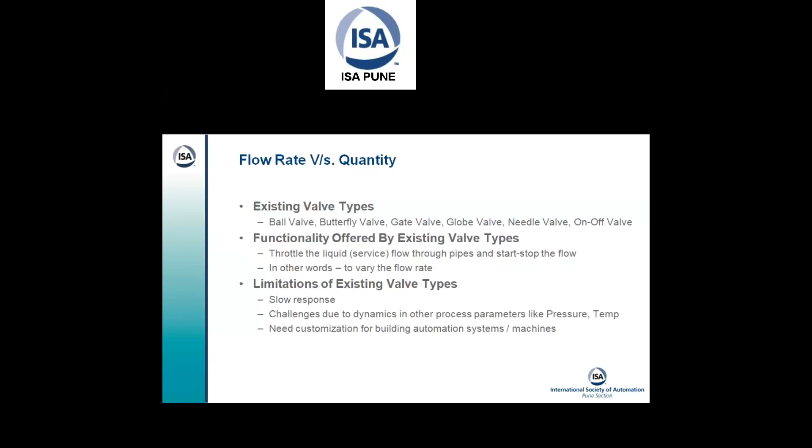So when liquid dispensing depends on flow rates, we need at least 2 to 3 different flow rates, then limited bandwidth due to customization. Then we have compensation arrangements for dynamics, making the automation complex, which leads to higher capex, opex, and space. Ultimately, due to less accuracy, huge cumulative losses are there.

And as these are the known limitations, and still some of them are in use, there is another alternative to valves, particularly the positive displacement pumps, the PDPs. And these PDPs, if they need to be controlled well within fine control, you need VFDs as well, which have a limited bandwidth, and again, huge cumulative losses are there.

And thirdly, flow meters or flow totalizers are used to take the feedback of what quantity has passed through, and the control or cutoff is made accordingly.

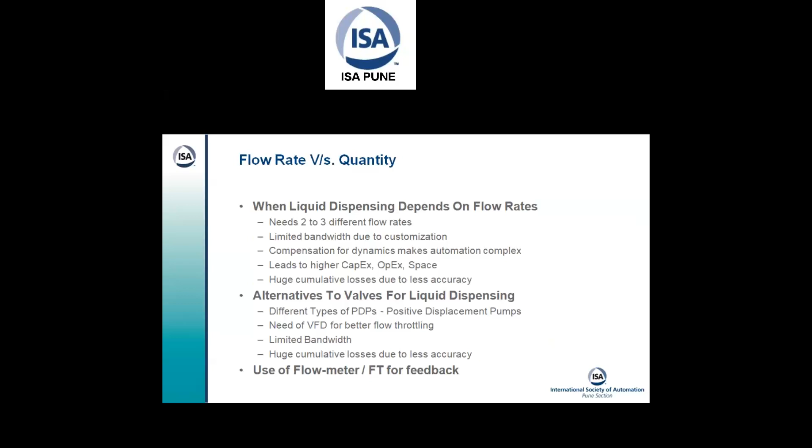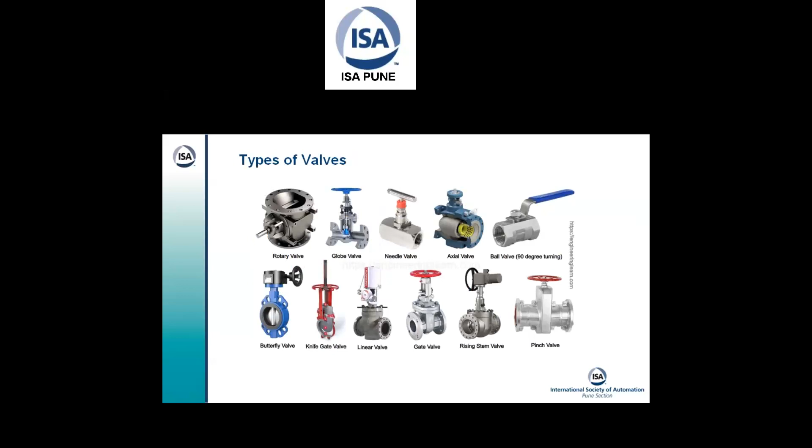So here are a few valve types. Not all of them are used for liquid flow. As I had this image, I chose it. Certainly the rotary valve we do not use for liquids, but then other valves, irrespective of their actuation, whether manual or automatic, these are the basic types in pictorial form. We have put it over here.

And next is the positive displacement pump. Not all the types, but some major pumps for positive displacement are displayed here. So they have their own advantages and disadvantages as well, but the things are not so simple.

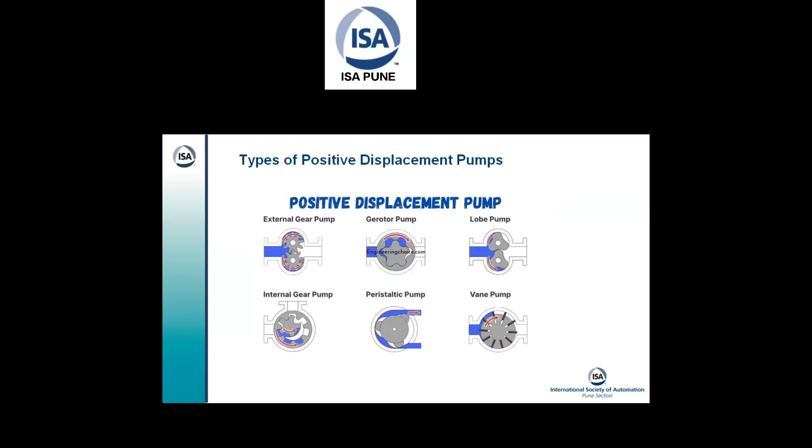So here comes the patented digital controlled valve, a disruption, or you can say a disruptive invention in industrial valves. So what makes it so disruptive? Basically, these valves are industry agnostic. That means you can use it right from any to every industry vertical.

Number two, the biggest advantage is these valves are configurable. Configurable means when you put a valve, you can simply configure it at a given site for the given requirement. You will see the details in upcoming slides.

These valves are versatile as far as liquid dispensing is concerned. They are precise and accurate — to what extent, that also we are going to see in upcoming slides. Then they have wide rangeability for multiple parameters.

So what are these parameters? Especially the header level — when the valves are connected to overhead tanks, the header level plays a very critical role. So a very wide range of header level can be supported.

The wide range of viscosities and liquid parameters, as well as dispensing and ambient temperature, can also be taken care of, since dispensing is based on a calibration profile. The product comes as a pair. Here I am marking the digital controller and pointing it out on the wall itself.

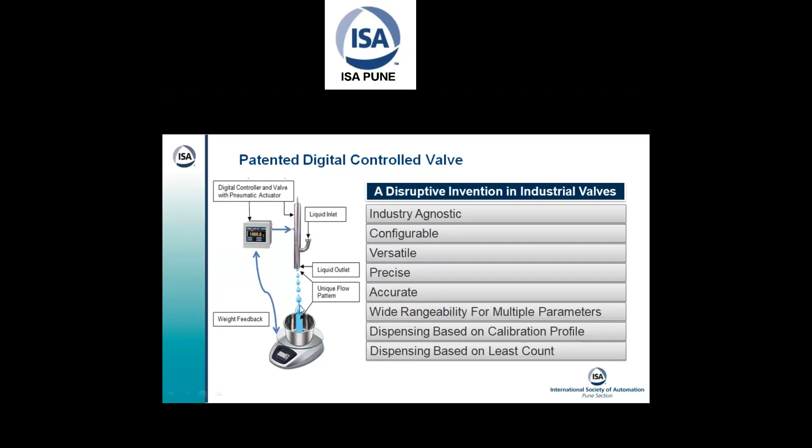Then the liquid outlet is here. The liquid flow pattern is shown here. The weight feedback goes to the digital controller, and then it modulates the air pressure to really dispense the liquids over here. Now, what is the next thing?

It is actually a sustainable paradigm shift. It is not for the sake of invention alone—the things are going to stay and make a sustainable impact on the industries. Secondly, as it is industry agnostic, and the changes are across the globe, it is going to have a global industry impact.

Then you have a simple application to take forward: select the valve off the shelf, install and configure. So out of very few valve sizing variations, you are able to pick one valve, install and configure, and you are sorted. It's readily adaptable to most liquids, and it sets new international standards in accuracy and precision, high return on investment and cumulative savings, and multifold savings make it a green technology as well.

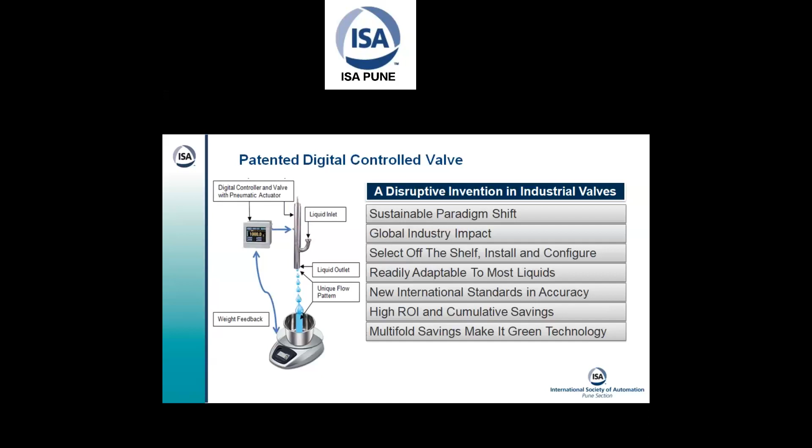So what is the USP? We must know, being a TechTalk here, the unique working principle of it. The newly invented liquid dispensing valve, in combination with the digital controller, generates dynamic aperture according to modulated pneumatic pressure.

As the pressure is modulated, the aperture of the valve opening is also dynamically changed, and the changes are so quick and for such short times that it dispenses a very unique flow pattern. So there is no typical flow throttling as we see in analog flow throttling—this is all digital slicing we do, and that is why we call it a digitally controlled valve.

So in the unique functionality, you will see the same thing—this generates a unique dispensing profile of discrete packets that are finely or closely deviated. The smallest packet quantity can be a drop weighing a fraction of a gram.

While when it is 100% open, it delivers the maximum flow rate, up to several hundred grams per second, and it depends on the valve size as well. This may vary with changes in size and other parameters involved in a particular application.

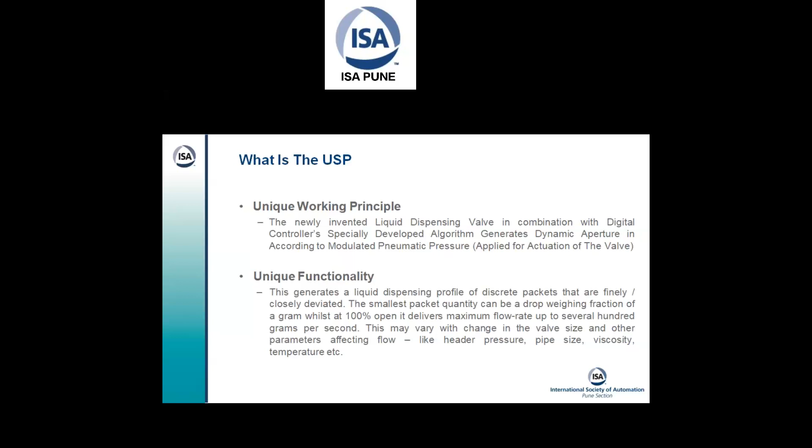When we have explained so much, we must see the product on camera—how does the product look, and what are the product connectivities?

Here is a very simple arrangement where you can see an overhead tank mounted. Simple pipe connection is here, and here is the valve, and at the back of it is the digital controller. You can see an electronic weighing scale here, where you can place a container, a bucket, or whatsoever to receive the liquid. So this is a closed control loop.

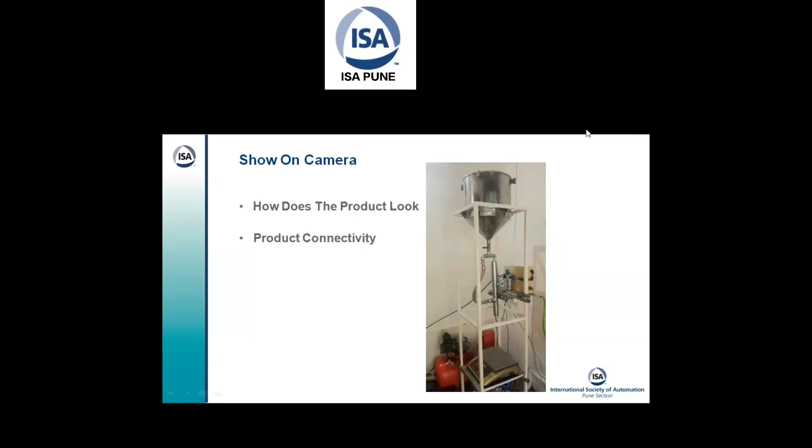So I'll stop my sharing and come on camera to show you the product, and come back to the presentation again.

So I am here on the camera. You can see I have the product right here. As you have some idea about the product, now I'm holding it horizontally so that it is covered in the camera.

So this pipe-like structure is the valve. I'll show it part by part. The upper part is the actuator. Here you can see the pneumatic input fitting for air modulation. Then this is the liquid inlet, and from the bottom is the outlet, which is tightly shut off right now. So this is the valve as a complete product.

And here is another, much smaller version of it. You can see the difference in sizing between the two products. This is under development, almost done, but we are still working on it. So such a small product is also available, and other sizes are equally available.

So I'll share the presentation again.

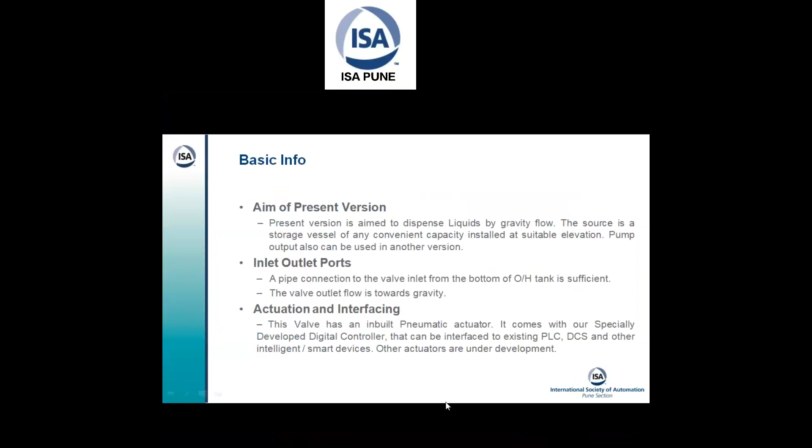So how is the feedback and control? This particular version uses the feedback from electronic weighing scale or load cells for a closed loop system. And as you know, the actual quantity doesn't vary. The weight is constant irrespective of change of viscosity also.

This particular feedback from electronic weighing scales is much more accurate than any other quantity measurement instruments. It gives you the highest accuracy when you take the feedback from the electronic weighing scale or load cells. Feedback from other process parameters is also possible, and we can calibrate like pH, temperature, viscosity in a process tank, and based on that, it can predict and dispense.

If you maintain a constant header pressure, it allows dispensing without any parameter feedback as well. And the calibration profile helps you in precise and accurate liquid dispensing.

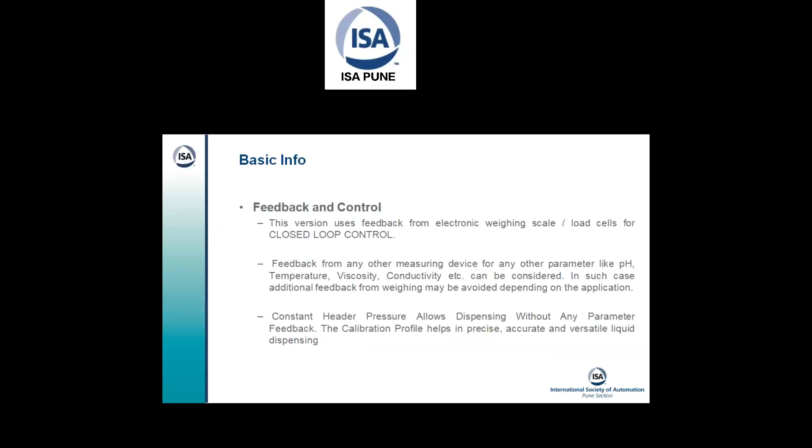So usability: the newly patented digital control valve is developed to precisely dispense liquid by gravity flow while eliminating dependence on factors like viscosity, liquid media, header pressure, etc. All these things are auto-tuned because of its unique functionality of several discrete digital packets.

One can pick it off the shelf and configure it at the site. Once it is calibrated, you can ask for any odd quantity and dispense it simply by typing in, and you don't need to have different calibrations again and again for a given site condition.

So you can switch to any other liquid very swiftly. Just clean the same valve if you wish, sterilize it, and select the respective profile from the digital controller, and you can use it for any other liquid dispensing requirements.

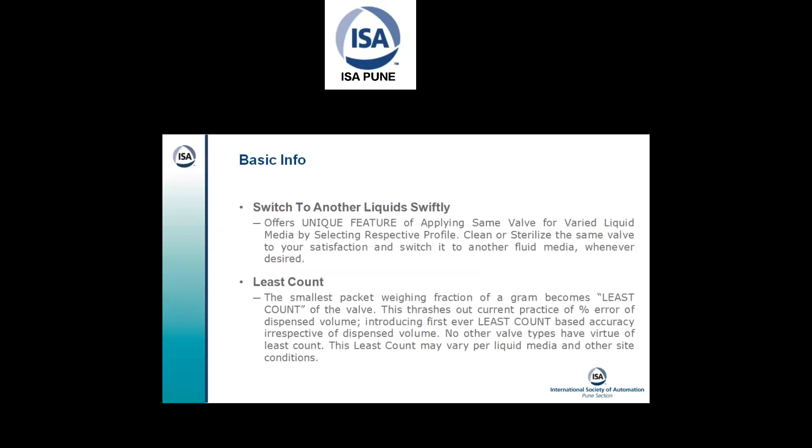So least count is the new advantage here, that the valve is able to dispense at par with the least count. As I was talking about the percentage error concept, here the percentage error, which is globally popular today, is thrashed out. Whether you dispense 500 grams, 1 kilo, 5 kg, or 10 kg, you can literally chase the target to a fraction of a gram, and the huge cumulative losses are saved because of it.

And this is what auto-tuned means, already covered. The commercial benefits are: with one single valve, you can flexibly use it for a variety of target quantities, variety of liquids, and different conditions. As you have different profiles already in the digital controller, you can invariably and flexibly use it with the highest versatility.

There are applications like a wide range of formulation batch sizes that can be covered using the same setup. You can do CIP and SIP, and with that I'll show you how a very compact setup can be put up. This saves capex, opex, and space by at least 50% or more, and increases throughput by at least 200%. It's worth retrofitting.

So you don't have to worry that if you have to incorporate these valves, you will have to scrap the entire setup. Only the core part, wherever relevant, only those components would be removed, and this can take its place and be retrofitted to give you the highest advantages.

The material of construction is SS316 and Teflon and other suitable elastomers. That gives you a long life, and most liquids are easily adaptable and compatible with that, right from food, pharma to hazardous chemicals.

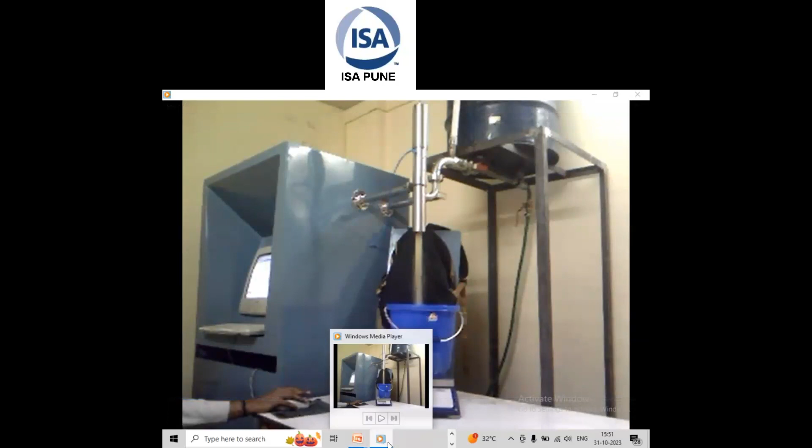Why is the drop coming? Why is it deliberately put? It is deliberate, it is not dripping due to unwanted closure. It is able to control even the drop along with such a big flow. That is the uniqueness of it.

And how accurate it is, you can see in another video. Are you able to hear the audio of this video?

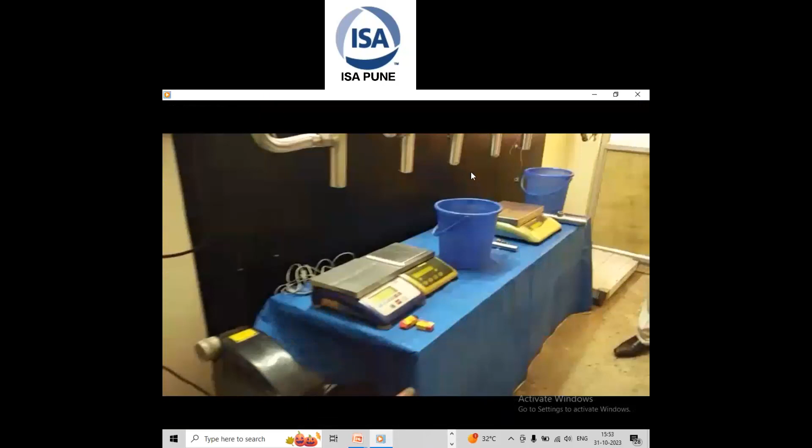No. Okay, so here the weighing balance is also automatically zeroed and tared after the bucket is placed, and it is asking to dispense. Container weight is there and it is starting now.

So you can see a number of valves here. That will also show how this arrangement can help us in different applications. And these packets are coming up.

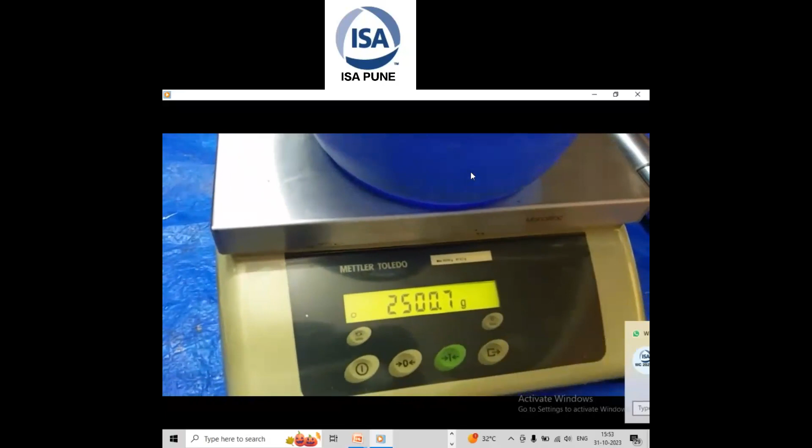2500.7 - so actually when the weight was stable, it was 0.3 grams excess. Now we'll see another video.

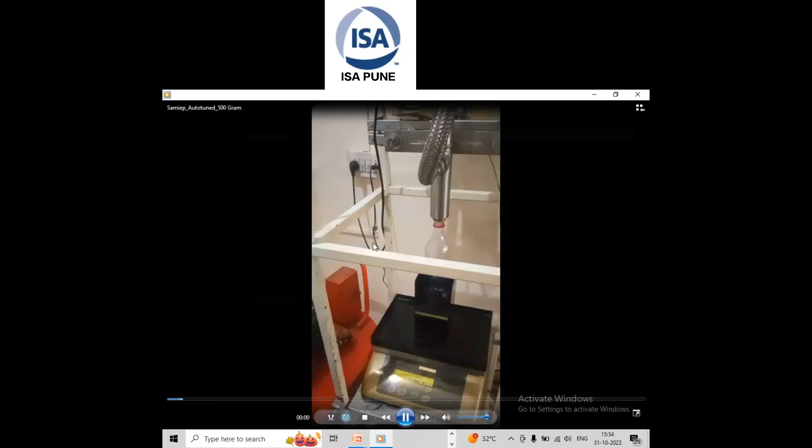There are... 500 gram target. So it is taking feedback of weight also while it is getting filled.

And you can see the weighing scale display. I think 500.3, it has settled. Yeah.

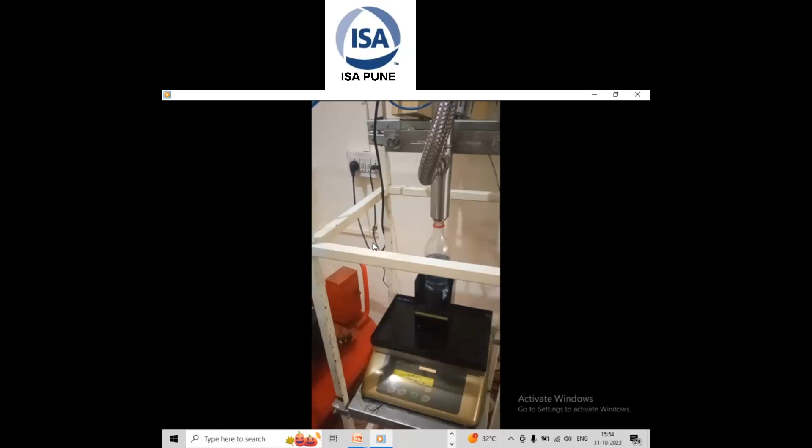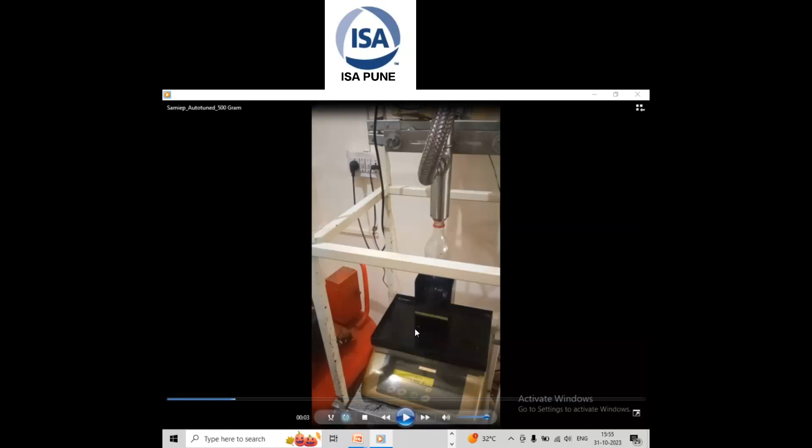Okay, so I think you must have got a fair idea about it. We'll stop the video here and go back to the presentation.

So applications in process industries are right from automatic formulation batching for production or even sample making or pilot scale. Then additive dosing we can do either with parameter feedback or open loop as well because of the calibration profile. Then typical filling applications like bottling, container, can, barrels, whatsoever, either with weight feedback or volume or no feedback.

pH control, programmable dosing, synchronous or asynchronous. And then micro, small, medium, or large quantities can be dispensed from one single nozzle at programmed intervals or in response to parameter feedback.

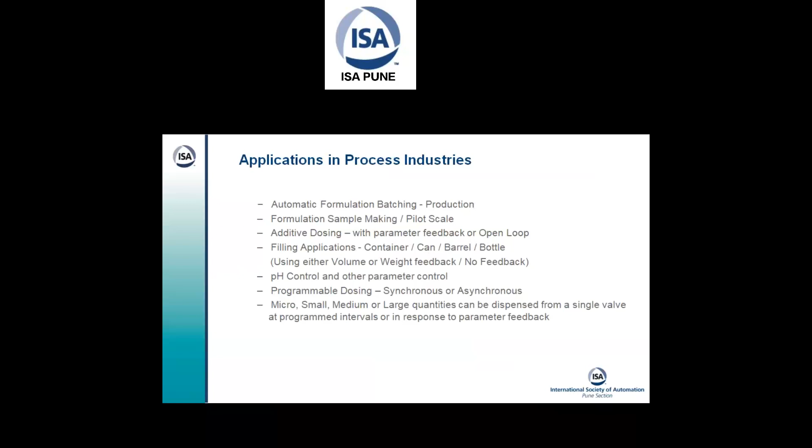So what we can say is suppose there is an exothermic reaction and you want to dose with the feedback of temperature, and you know that with a rise of a certain temperature how much you are supposed to dose, then those kinds of patterns also can be defined and controlled.

So here is a compact arrangement example of automatic formulation batching. This arrangement we saw in an earlier video, whereby a number of nozzles are mounted on a slide rail. And what can happen is the nozzle can be slid over to a particular filling station where the batch is carried out. You can manually lock it.

You can connect the container and dispense any odd quantity based on its profile. And once the dispensing is done, you can pass the nozzle for cleaning and bring in the next nozzle by sliding in. So with this kind of arrangement, hardly even 10 odd number of nozzles would be sufficient for you to take care of hundreds of raw materials in automatic formulation batching.

And now I have shown a cluster of overhead tanks here, whereby if you use the calibration profile and it is a simple mix and you want to have simultaneous dispensing, then each digital controller will take care of each tank for dispensing whatever quantity in whatever proportion it wants to, and it will dispense at once.

If you want to take feedback of the load cell, then one by one tank dispensing would come into picture. So a variety of such combinations can be done with different applications.

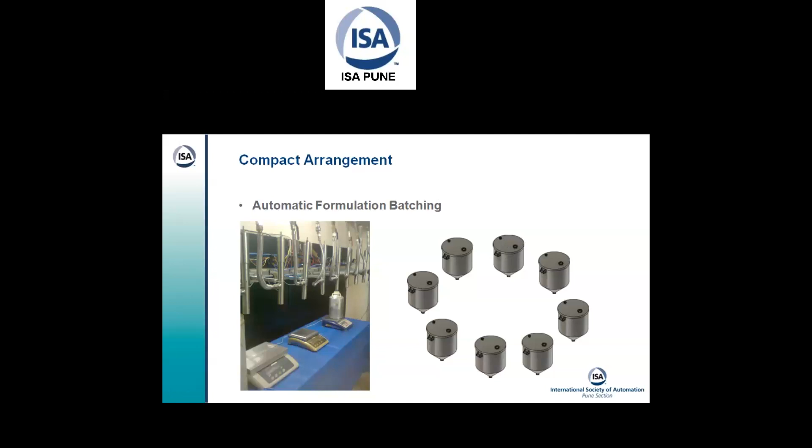At the same time, you can see on these particular vessels there is an inlet here for refilling. These tanks are completely designed to be compatible to sustain a certain pressure. And then you have another inlet on top of it, which can be used either to expose the liquid to atmosphere, or you can put nitrogen pressure, or you can connect it to a vacuum if after use you want to clean and evacuate all traces or odor inside.

And what we see is generally that there are 3 P's in manufacturing: production, packaging, and penetrate. So production and packaging we already have discussed, but what is there for penetrate? What happens is the market is always scattered.

And when the market is scattered and you produce it at one place in large quantity, then you have a lot of challenges in having a lot of resources at one place, needing very fast machineries at one place, and then you end up with huge cumulative losses as well. And then ultimately you need to have a dealer distribution arrangement whereby you lose at least 40% of your margins there.

So in the penetrate section, we have come up with a concept called DAD, decentralized automated distribution. There would be a DAD unit taking care of the hyperlocal market, and it can support you just on a call basis. You don't have to have large agreements for your bottling jobs to be done or your blending jobs to be carried out, but you can do it on a call basis as well for a day or two or whatsoever. And then you can have it like a just-in-time and just-required-quantity concept, taking care of the hyperlocal market.

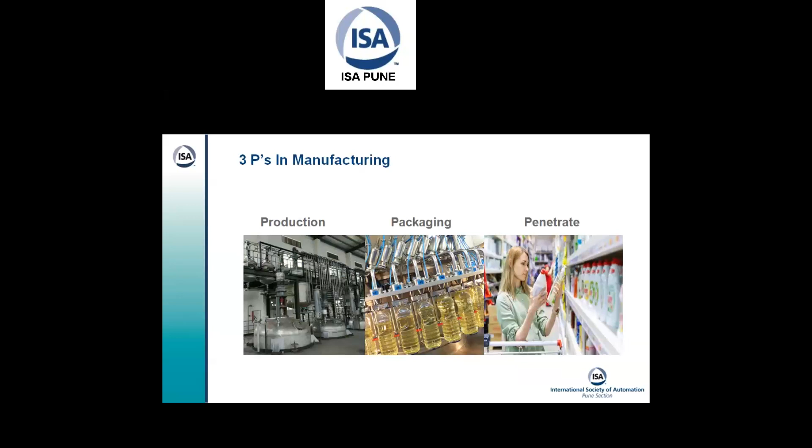And I'm coming to an end. If you consider the sector of impact, almost every industry vertical, right from cosmetic, flavor fragrance to pharma, API, Ayurvedic products, chemical, dairy, food, even defense - we were invited by ISRO to carry out a live demonstration of rocket fuel, which really worked out beyond their expectations, and they gave us a letter of satisfactory demo as well. You can expect this product in oil and petroleum, water, wastewater, and almost every industry vertical - biotech, polymers, leather, paint, ink, adhesive, specialty chemicals - you name it, everywhere you can really make use of it.

So to summarize, what we have reduced and what we have increased: we have reduced number of valves and piping, cumulative losses, capex, opex, space, automation complexity level, design efforts - because it is configurable, you can pick off the shelf and configure. It has reduced carbon footprint, dependency on liquid media - that is change of viscosity due to ambient temperature or header level - and any quantity requirements. And what it has increased is rangeability, versatility, accuracy, precision, consistency, product quality, ready adaptability, affordability, throughput, ROI, and process uptime.